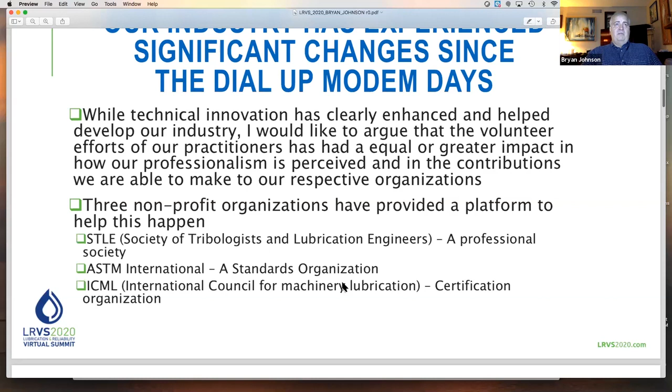Okay, so I'm going to go ahead and read this first bullet because it's significant to the argument I'm trying to make today. And that would be that while technical innovation has clearly enhanced and helped develop our industry, I would argue that the volunteer efforts of our practitioners have had an equal or greater impact in how our professionalism is perceived and in the contributions we are able to make to our respective organizations. I've long been a believer that the tools that we have are marvelous and helpful, but if we don't have the right people to exercise the tools and to implement them and to basically become champions within the organization, the tools are of lesser importance.

So thinking back to my time, I'd like to focus on 3 nonprofits. I will comment that there are others that also have contributed greatly, and I don't intend to minimize any other contributions, but I'm picking on these 3 because these are the 3 that I'm most familiar with. So the 3 that I'd like to discuss to some degree in the rest of this presentation would be STLE, the Society of Tribologists and Lubrication Engineers. This particular group is a professional society. It's a place where people within the lube industry can meet, have an annual meeting, have a conference, they have trainings, and lots of good programs. That would be one of the 3.

The second would be ASTM International. I've had involvement with ASTM, and it's actually been quite marvelous, but this organization is different than STLE in that its purpose, its charter, is to write standards, trying to provide an anchor to the information we have in the industry. And the third one I'd like to talk about is ICML, the International Council for Machinery Lubrication. This group is a certification organization, basically to help the practitioners have a way to demonstrate their knowledge and their skills. So we'll continue on.

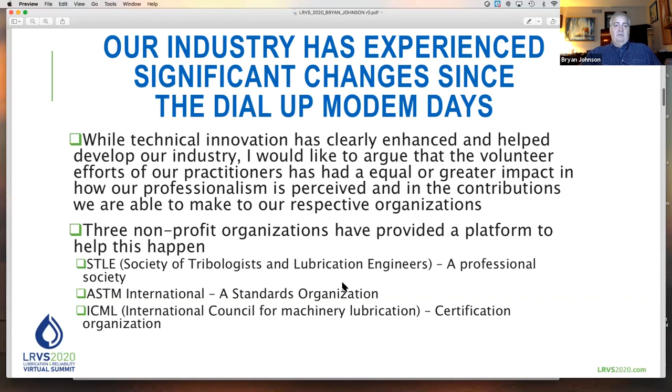First off with STLE. So when I got into this industry, I attended my first STLE meeting a few months after joining my current company. And the buzz at the time was the Certified Lubrication Specialist exam. And what STLE had very correctly identified was that the professional within the lube industry wasn't getting their due as other professionals in other industries might have.

And I'll use the mechanic in the plant as an example of this. It wasn't too long ago that a new person coming up in maintenance would be given the job to go and grease all the motors and to change the oil and to do that type of an activity. And that was an entry position, and that was a position that they were pretty eager to get out of so they could get into real mechanics work. And that's how they perceived it, and that's how management perceived it, as a less valuable option.

Now, I would also argue that the lubrication engineer, someone like myself, also had a similar bias within the engineering world. Oh, it's just lubricants. And I think that was a common perception.

So STLE, and this was over 30 years ago, they were just rolling their test out when I got into this. They developed the certified lubrication specialist as a way for the experts in the industry to be able to say, hey, I can do it. I've been certified by somebody as having knowledge to contribute to the organization. I think this was a start. I think this was a very important piece in bringing a level of professionalism to those that were practicing what we do.

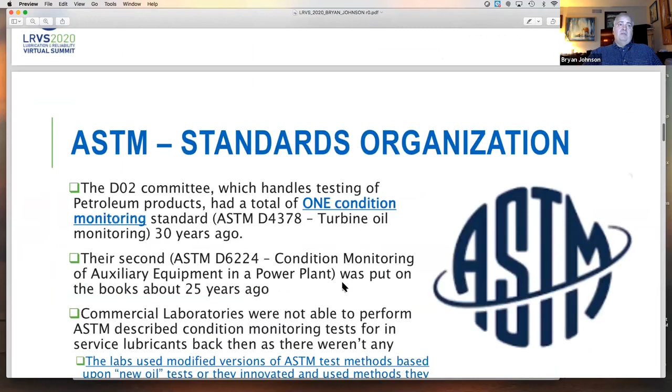Okay, so I'm thinking back in time again to ASTM. I joined ASTM early in my career. I did it because we installed an on-site oil laboratory, and I felt because we were trying to do ASTM type standards that I should probably better understand what they were and be involved in those kind of groups. When I arrived at ASTM, I learned that ASTM had one single standard that was related to condition monitoring, ASTM D4378. This was on turbine oil monitoring. It provided programmatic type information, and that was it. That was as far as it got.

I was part of a group that developed the second standard, D6224, condition monitoring of auxiliary equipment of power plants, and this really is a very, very cool document, because it's a roadmap for how any industrial facility could manage its oil condition monitoring program. That was put on the books about 25 years ago.

So the thing about this that's kind of interesting is that at the time, if you contracted a laboratory to do your testing and you asked them, are you doing ASTM tests? They would say, well, we do ASTM-like tests. And that doesn't mean they weren't doing the best job they could or they weren't providing a high level of value. That just means that they weren't able to do ASTM tests on condition monitoring or in-service lubricants simply because there weren't any. And so what they were doing was taking the tests available, and the tests at that time were written exclusively to sell new lubricants.

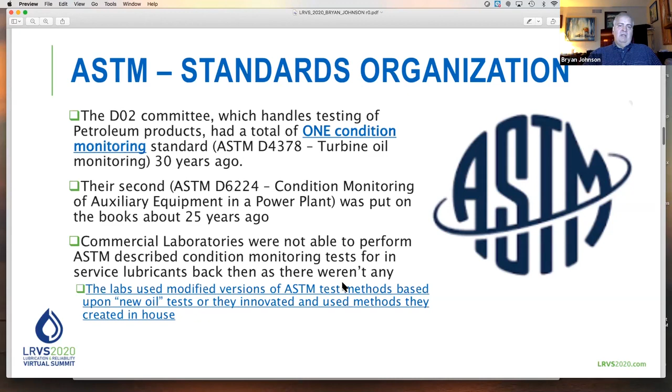That was our baseline. And the third organization that I want to talk about is ICML, the International Council for Machinery Lubrication. So 30 years ago, ICML did not exist. It was incorporated in 2001. And so this is actually a very, very important organization and platform to our industry. And 30 years ago, they weren't there.

So the changes that have occurred within our professionalism, within the development of our people, really have slowly increased over the years, and let's talk a little bit more about those. So since the time of the CLS test, 30 years back, STLE has introduced additional certifications, oil monitoring analyst. They have 2 in that series. They recognize that the condition monitoring industry is important, and they have been working as a group to further training and knowledge and certification in that area.

ASTM, when I joined 30 years ago, was ASTM American. It was very closely associated with American standards, and they have since rebranded themselves to ASTM International, with the acronym just being the name, and have become a much larger global presence. So since those first 2 standards all those years ago, dozens and dozens of new standards have been developed. Existing standards have been modified to include condition monitoring.

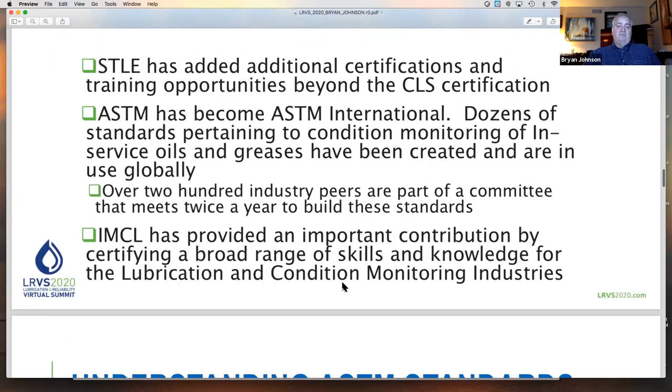So look back at ASTM standards a little bit. So test standards are not all the same. A particular topic could have several standards that are designed for it that are all different. They may measure the same particles in an oil sample, but they measure the particles in a different way. And because of that, the data that they produce isn't going to match necessarily. It could. And so basically what I'm saying is that the different test methods do introduce a bias between themselves. These different test methods also have different levels of accuracy or precision.

So a couple of the prime ones, emission spectroscopy and ICP spectroscopy, these are workhorses in the condition monitoring industry, and they are different technologies or techniques. They actually are able to test different sizes of particles, and they test them in different ways. So they will produce somewhat different data.

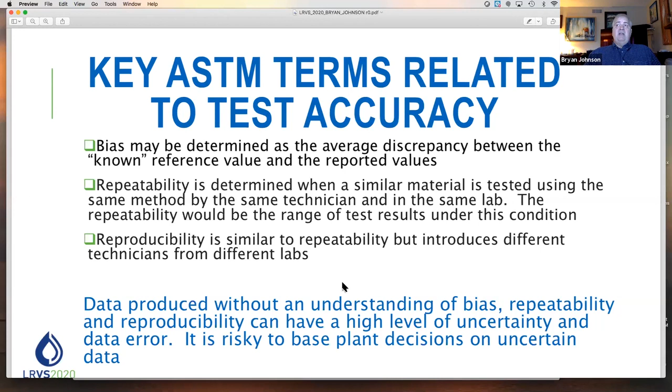So the severity of condition could be enormously different, and the sensitivity of the test could become very important. It's less important to be spot on for the gearbox, very important for the data to be very tight and accurate on the main turbine, because if 1 or 2 ppm are important, a deviation from test to test of 2 or 3 ppm could give false information.

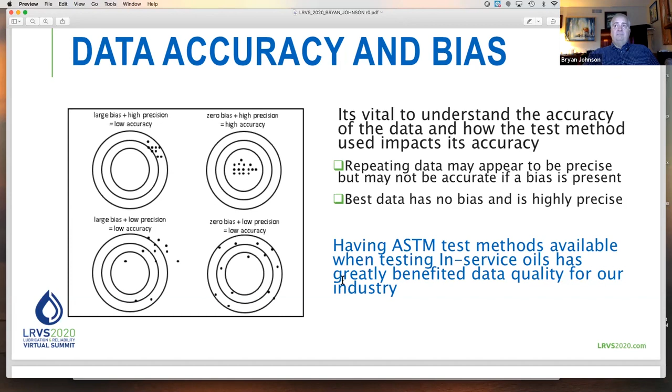There are other guides that are being worked on within the condition monitoring group. One of these that I think will be very important, one of the prime areas that we do testing, would be in the diesel engines in the transport industry. That's a significant part of the condition monitoring industry. And ASTM is currently writing a guide on how to do that, what to do with that. I think when that's issued, that will be extraordinarily valuable.

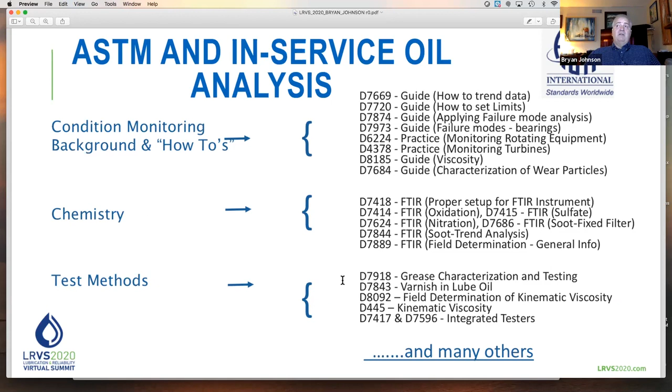Varnish and oil. Varnish has become incredibly important to the industry in the last 20 years. With the change in formulations of oil, there was a major processing change in how oils were built. It also opened the door to varnishing issues that weren't there 25 years ago. And so we have the ability to measure and monitor that, also very important.

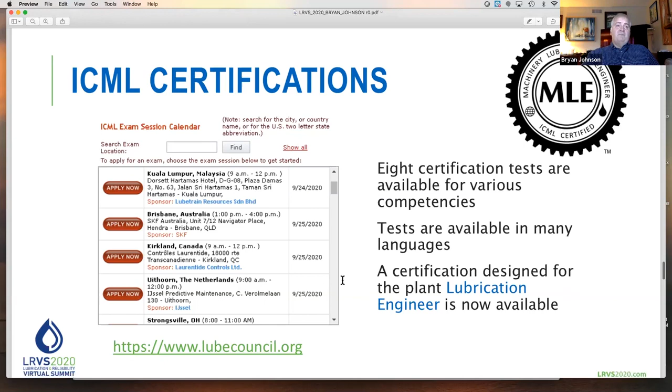In the upper right-hand corner, I'm featuring one of their certifications, the Machinery Lubrication Engineer, the MLE certification. So ICML basically took the CLS concept one step further, aimed at the engineer in the industrial facility to provide a demonstration of a high competency across a very, very broad range of skills that the engineer in an industrial facility would need to have to be successful for their organization. So something else that some of you might have some interest in. So ICML is expanding its value.

ICML 55 is its first attempt at a standard. ISO 55000 is one of the current, more recent focus areas of the ISO suite of similar standards, and it focuses on asset management. ICML took that concept and built a standard using the ISO 55000 requirements aimed right at an industrial facility, and looked at lubrication assets.

Now, when you think of lubrication assets in an industrial environment, you might think of machinery, and obviously that's a big part of it. But in fact, the assets of a lubrication program are much, much larger than just the machine. And very important to have a program that accounts for all of these. Very easy to focus on aspects of a program that would limit an organization's effectiveness, because in reality, any of the 12 areas that ICML has identified that is weak could bring a program down.

So this particular product, it provides a roadmap and a way for the industry to define what a good lubrication program looks like, what elements need to be strong, and how eventually, I believe, will grow into a product that will be usable and useful in taking lubrication programs up to the next level. And as we all know, a strong lubrication program in an industrial facility saves money, and this is a highly valuable tool.

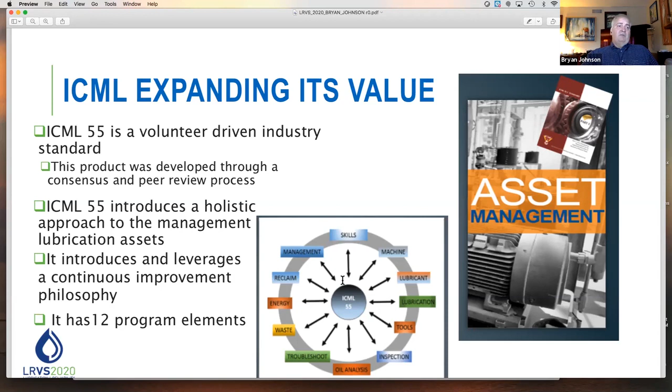So to make a program work, we can put in processes, we can put in expensive tools, we can buy expensive instruments, but if we don't have the people to run that, and don't have the people to manage it, and add the additional knowledge that we all have, the program won't work very well.

So many years ago, and this is something that still kind of sticks with me, I met some individuals from a coal power plant, and they had a fleet of 5 coal power plants. They had a condition monitoring program, which included lube analysis, and they commented to me that they were considering canceling their lubrication condition monitoring program, because over the previous 4 or 5 years, they hadn't found a single thing wrong in any of their plants.

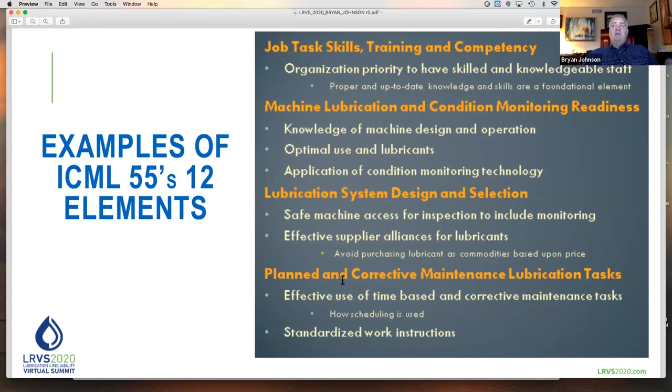And then the 4th one I have here would be tasks. It's just really important to be organized and have a plan in place. And this talks to a maintenance plan and how the maintenance plan is implemented. These would be 4 of the 12 elements. So within the ICML 55 product, one can do a deep dive and get different attributes that are important to help one build a better program.

Okay, so some takeaways from my presentation. So 30 years ago, I don't think there was an awful lot of help out there for the lubrication practitioner. A dear friend of mine explained to me that when he broke into the industry, and this would have been maybe 40 years ago, the company that he got a job with, he spent his first year in training. They had an extensive in-house training of their lubrication engineers to ensure that they had a high level of knowledge, so that when they went out and worked with the customers, they could help their customers.

And I believe at the time, and 30 years ago would also be true, that the primary knowledge holders within our industry were those people. Yeah, we had university people, we had an occasional industry person that had a high knowledge, but really the knowledge was held within a very small group of trained people trained within their organizations.

So since that time, that type of training I would expect would still be done to some extent. I don't know how these companies, or if these companies are looking outside to some of the things that have been developed since. But the three nonprofits that I mentioned have stepped in and provided platforms for us as end users, as practitioners, to assemble and pool our knowledge and work on common projects and simply get better. So the end result of this is that the knowledge of the plant personnel has increased.

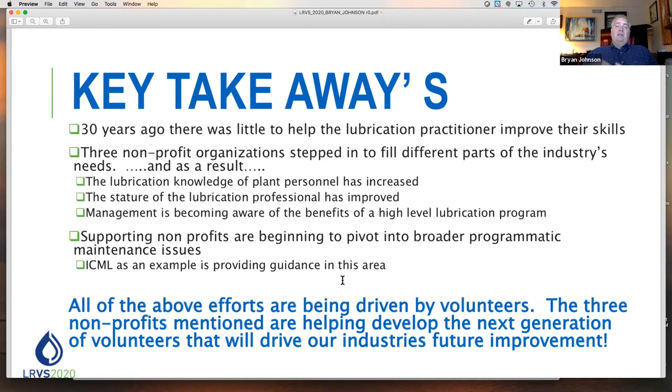The final point on this would be these efforts are being driven by volunteers. So there's not a company of experts that is available per se to the industry, although through volunteer platforms there is a whole cadre of people that are involved, that are available to the industry at large, that help us get better and stronger.

So a few guesses on what's next. I would guess that in the next 30 years, we're going to move further away from where we are today than we did to move from the cable modem days to today. I think that the progress of change is here. It's going to get stronger. Digitization is a big part about that. I believe that expert rules are going to become much more common in condition monitoring. They're going to be broadly available to the people that do it.

There's a caution with this, and the caution would be if the rules become really good and the practitioner's skill level or understanding of the rules becomes less, then I think overall the quality of programs might suffer. So I would expect that the three organizations that I highlighted are going to continue to provide additional value and knowledge.

And the final point, one of the things that has been very important to me over the last several years would be the impact of the environment on our profession. You can see this very strongly in Europe, with its various rules and how chemistries are handled and managed. I think that the REACH program is how they term it.

That has carried throughout the world, and those rules have changed how our lubricant manufacturers are blending their lubricants, how they're distributing them, what materials they're sourcing, and I believe this is a starting point that forces change. So as regulations change, in part in response to emergencies that we have from an environmental standpoint, climate change and so forth, efficiencies, I believe this will also continue to become much more important.